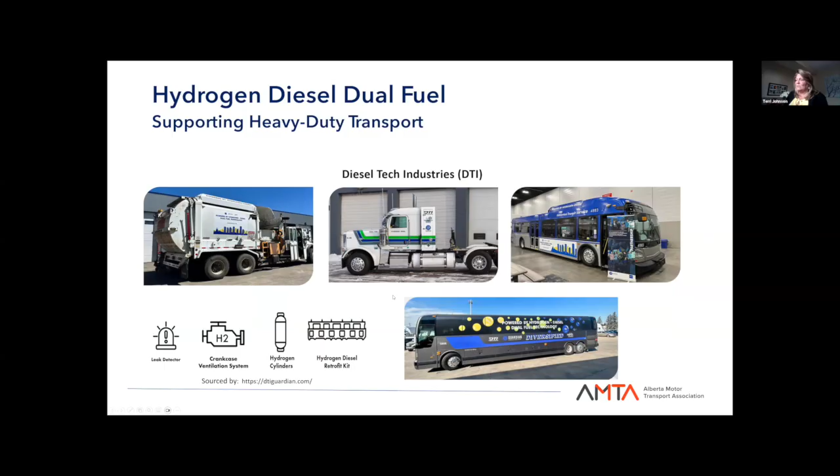Big shout out for hydrogen diesel dual fuel. So far, everything I've been showing you has been fuel cell electric, which provides 0 emissions. The hydrogen diesel dual fuel is another technology that is being used in industry that is providing reduced emissions. So all sorts of forms of vehicles, what they do is they take a diesel retrofit kit and put that on the engine. So in the case of this vehicle, you will have an engine, you will have a drive train or a drive line back here, and you will have hydrogen on the back of the vehicle as well. So it's a different configuration that will help to reduce emissions.

AMTA is also involved in the Zero Emission Truck Test Bed, which is a project sponsored by Transport Canada in partnership with Deloitte.

We have one vehicle that's battery electric traveling Surrey to Mount Vernon, and then we've got three here in Alberta that are going to be trying to work that Edmonton to Calgary corridor. And that's where you come in, Zach, because AMTA represents Edmonton and Calgary.

Right now, there's only hydrogen in Edmonton. We need to get it down into Calgary as well so that we can complete that big corridor.

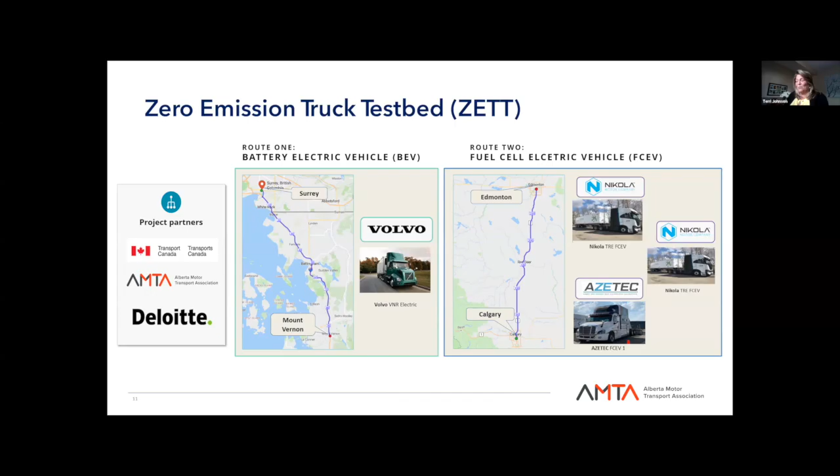So what are we looking at here when we do the ZETT trial? Is it the same thing as what we're doing with the others? No, this is very different. We're taking a look at various kinds of vehicles, understanding prototypes versus production vehicles versus pre-production vehicles, and what these vehicles operate like when they're on the road.

Some of them are 70 kilograms. The hydrogen diesel dual fuel is only 15 kilograms of hydrogen that goes in. Some of them are at 350, some at 700 — others vary depending on the vehicle as to the type of hydrogen.

Each of them can go a different amount of kilometers, and we're trying to validate that not only off of the specs from the vehicle manufacturer, but real world trials. And this is not an error here with 20,000 kilometers — your hydrogen diesel dual fuel will extend the range of a conventional truck, so it adds in those extras.

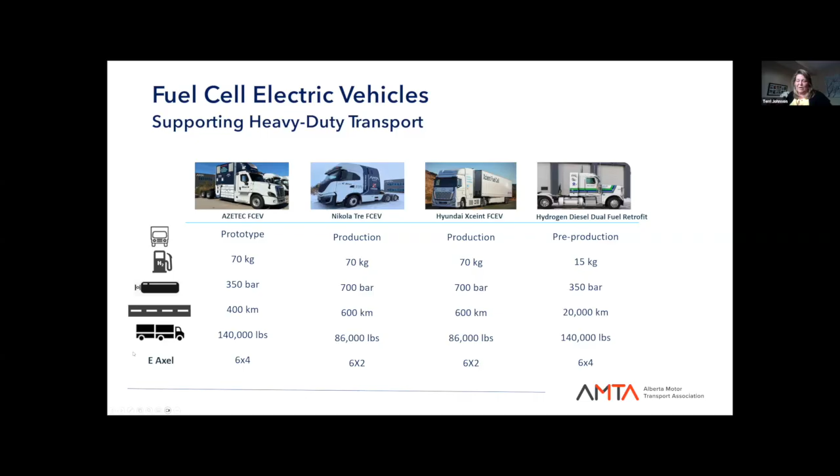So this is assuming one of the largest engines. And taking a look too with regards to the weight, this AZETEC, our little baby here, is looking at 140, whereas the others are looking at 86,000. Then taking a look at the e-axles as well, and the different vehicles and configurations — so there's a lot to be learned through this trial as well.

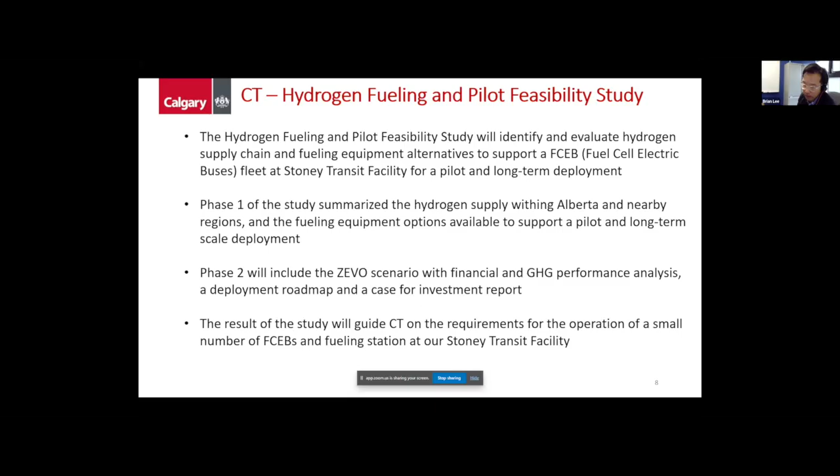The study is broken down into two phases. Phase 1 is about the hydrogen supply in Alberta and what kind of fueling equipment we would need at our facility. Phase 2 is more about the scenarios and what it means in terms of the financial aspect and the GHG performance of this kind of technology. Later on, I'll show a roadmap of what that might look like.

Similarly to options 1 and 2, option 3 was further broken down into green or gray hydrogen—we want to understand the very comprehensive aspect of hydrogen supply right now. Option 4 is looking at producing our own hydrogen using biomethane.

It's more of a semi-permanent setup on site. You'll also notice we're looking at both a pilot short-term project and how that translates into a more long-term solution for Calgary Transit. For the long-term option, we are looking at a more permanent liquid supply with on-site storage and fueling facility, but also an on-site gaseous production and fueling system where we use electrolysis to break down water into hydrogen and oxygen.

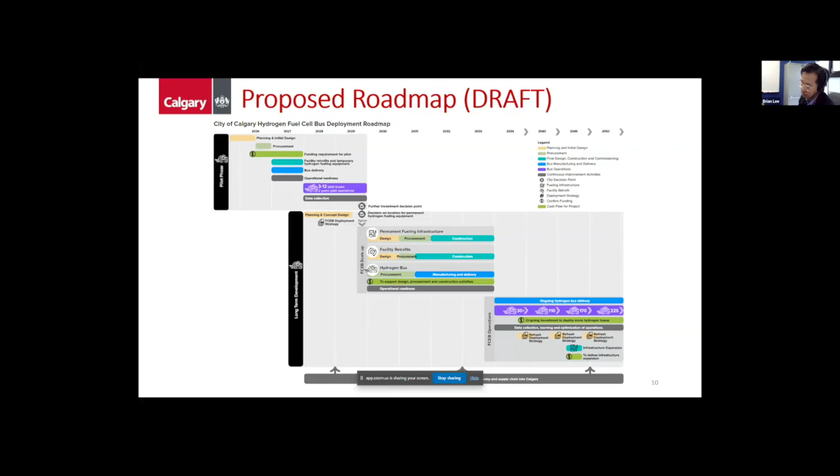For this to come to fruition, as Terry and Zach talked about, we need several things to happen. We need approved funding, and hopefully the price of hydrogen and the buses will go down. We need a very robust hydrogen supply chain in Calgary—obviously we can't run buses if we can't fuel them. Also, hopefully we'll see advancement on the technology side, with more range, less complex fueling systems, and green hydrogen being more easily available.

Also, if we can obviously get a reliable supply of hydrogen in Calgary, we will collaborate with either ETS or StAT to see if we can get one of their pilot buses in Calgary so we can get our hands on it and test it out and see how it does on our roads.

We will complete the hydrogen feasibility study and hopefully share the results very soon with our partners. And again, finally, we're looking for funding opportunities to fund a potential pilot project. That's all I have for today. I'll give it back to you, Zach.

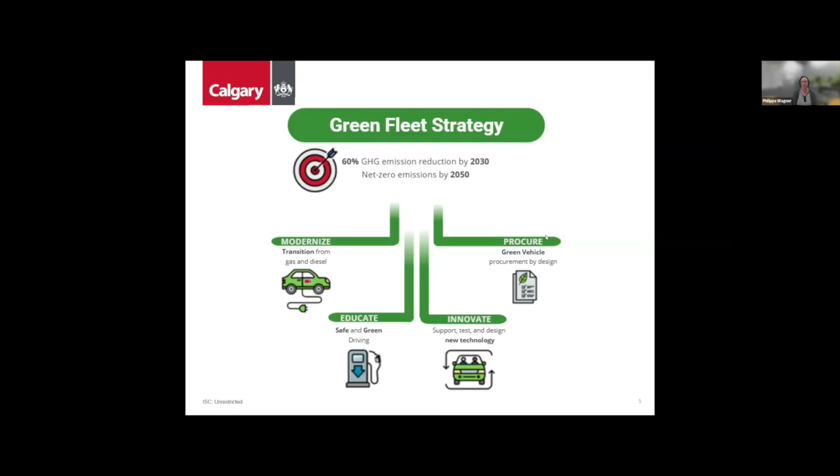Finally, procurement. That's something we're doing right now along with the education, making sure we're right-sizing the vehicles. What size of vehicle does this need to be in order to get the work done? What's the most efficient vehicle, so we're not running larger vehicles unless they need to be. Also, another aspect is looking at where in the corporation we have underutilized vehicles and trying to offer alternatives for those as well, so we're not just having vehicles that are maybe needed once in a while. Maybe we can combine that once-in-a-while requirement with another business unit's once-in-a-while requirement and avoid having one vehicle altogether.

So we have been doing a lot of projects in the 2 years since I've been with Green Fleet, and I'll highlight some of these. I won't go into too much detail, but we've been looking at renewable diesel, also known as R100 or HDRD, and we've ramped up that program this year where we use just over 2 million liters of it in the summertime, and that fuel comes with about a 70% reduction in greenhouse gas emissions.

We currently in our fleet are testing a hybrid refuse truck and a fully electric refuse truck. The hybrid we've had for getting close to 2 years now, the battery electric truck is just this year. So those are ways that we're looking to reduce emissions.

Finally, the battery electric street sweeper and the battery electric delivery truck were 2 vehicles we tested last year, and they were very short-term tests. Those are opportunities that sometimes we have through our current vendors, that they're able to access other pieces of equipment. For the street sweeper we had it for about a month, the delivery truck was about a month and a half. We were able to test those.

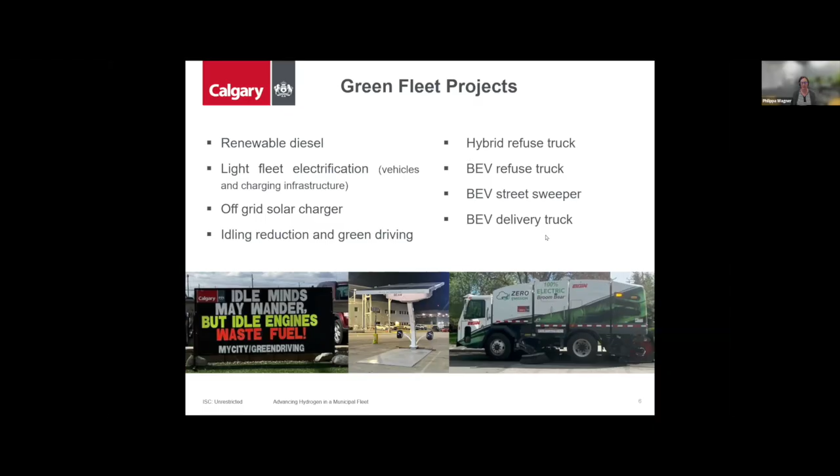So now getting into the relevant project, which is Advancing Hydrogen in Municipal Fleet. This is the project for which we've received over $2 million in funding from Emissions Reduction Alberta. We are testing vehicles and equipment as part of this project, and also modifying a maintenance bay so that we start to get some experience with what's required to convert a maintenance facility to manage hydrogen vehicles in the future. So our plan is to test the following.

We're testing a mix of fuel cell electric and hydrogen ICE vehicles, meaning using hydrogen but in an internal combustion engine—a bit more traditional, maybe different in look and feel than a fuel cell electric vehicle, but it's a way we can test a lot of different things. For Class 8 trucks, we'd like to test one fuel cell and one hydrogen ICE. For off-road equipment, an excavator that's maybe fuel cell electric, and an ICE backhoe. We're also looking for a forklift and a passenger vehicle, both fuel cell electric.

Outside of that, another area we're looking to test hydrogen is through hydrogen diesel dual fuel. You'll know from Terry's presentation with the AMTA that hydrogen diesel dual fuel can be a great way to offset emissions while also getting into that hydrogen market. A dual fuel vehicle can run entirely on gasoline or diesel, so if the supply of hydrogen is interrupted, the vehicle can still operate, which is incredibly important for a municipal fleet. Our priority is providing service to Calgarians, so it's very important that we keep rolling.

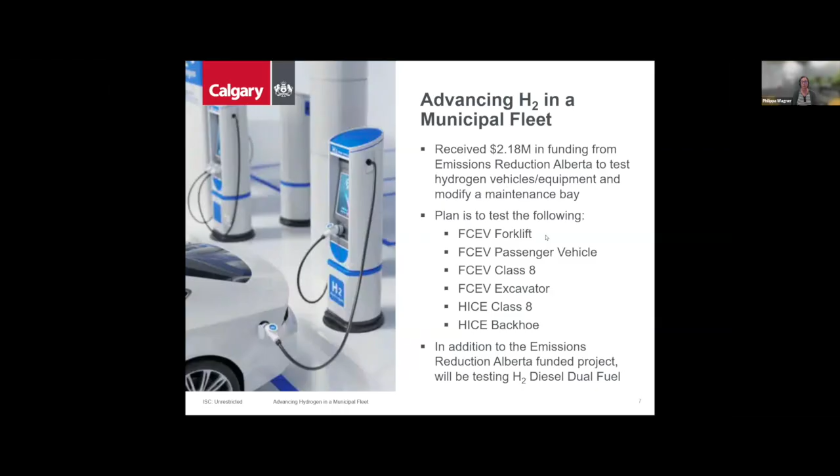So for that hydrogen pilot piece, the ERA project, we've been working quite a bit on the design for the maintenance bay modifications. That's proceeding very well, and we're working with our facilities group to make that happen. We're learning a lot as we go, even in these initial design phases. Unfortunately, we are seeing some delays on both the fueling infrastructure and the vehicle procurement aspects. As we've talked about in other presentations, the fueling infrastructure in Calgary is not up to speed right now for us to deploy any vehicles.

And vehicle procurement is changing every day, I think, in the hydrogen space. We're looking for a little bit of stability so that we know what vehicles would be appropriate for us. There are some vehicles we could purchase immediately if we had that hydrogen fueling available. Right now our project testing is planned through 2027, and that's already a 12-month extension we've received from Emissions Reduction Alberta.

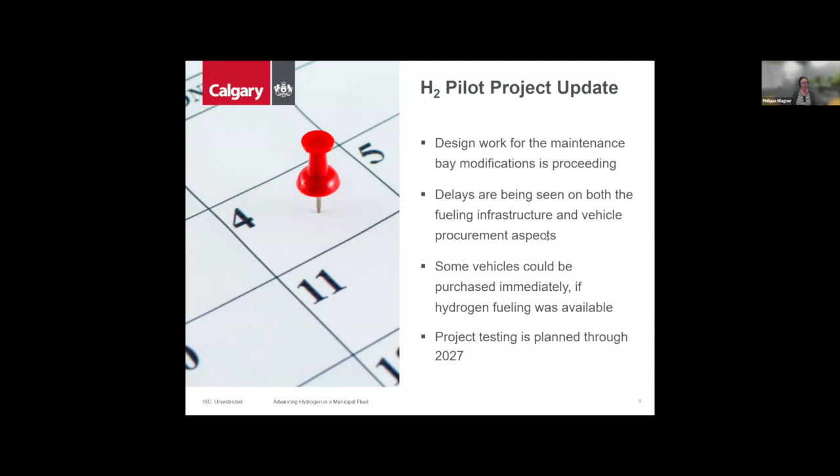But there's a lot of potential here, and this is kind of where we are right now. We have a very small seedling—I'm not even sure the seedling is at this point in its germination, but we at least have a seed, and that's where we are right now.

But there's huge potential with the City of Calgary. We have over 2,000 medium and heavy duty vehicles, and if hydrogen is proven successful and becomes the primary fuel for the City of Calgary to replace diesel, this potential is huge. With 2,000 vehicles, it could replace the combustion of over 10 million liters of diesel. We would also need to look at modifying 15 city-operated fuel sites, because all our fuel sites offer diesel, and only some offer gasoline, since our fleet is mostly diesel rather than gas. We'd also need to change maintenance and storage facilities.

So that's another aspect. The potential can go from this little tiny seedling to massive trees, or even an entire forest. We want to stress that at this point, we're starting small, but we have room to grow.

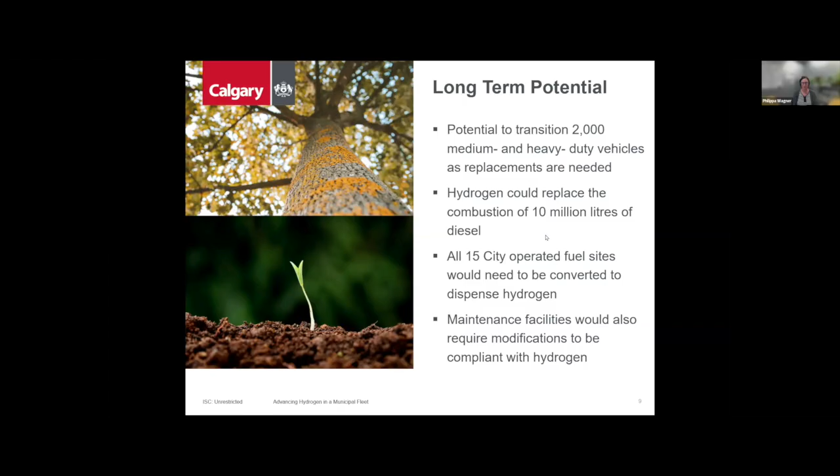What's to come next? Right now we actually have an RFP, a request for proposals, out for a hydrogen forklift—that's out there on the market, closing September 4th. We're also looking to do an RFP for conversions for the hydrogen diesel dual fuel; that's coming down the pipe very quickly. And we're doing a market scan for what other vehicles are available. There's a lot of change in the market, and this is something we'll be doing a lot, but the market scan will help inform our next steps, and obviously securing a source of hydrogen so we're able to fuel vehicles when we start getting them in.

And then finally, just as some ideas or areas to go, if you're looking for more information, I'm certainly willing to entertain any questions. If anyone wants to reach out to me, my email and phone number are there.

There is a lot of information on calgary.ca/greenfleet, and there's even reports on a lot of the pilots that we've run, giving a bit of a one-pager of how those have gone and the lessons we've learned. We also want anyone in this market to keep an eye on opportunities to be a supplier to the city.

That's at calgary.ca/buy-sell, and there's an opportunity to sign up for what's called Ariba, which anybody putting in bids for the city would need to be signed up for. Thank you, that is my presentation. Back over to you, Zach.